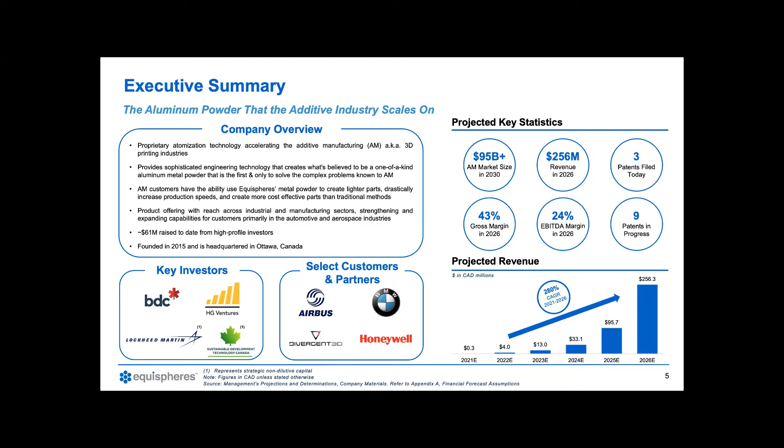The first 4 rounds were from Canadians across the country. We've had a really great track record of hitting our milestones, creating value, and steady improvement for shareholders along the way. We've been working with the world's leaders, literally in aerospace, automotive, and defense. Pretty much all the relationships you'll see today were all inbound demand.

Back in 2016, when we had first revealed our new technology and the material that's made from it, we had 20 calls from billion-dollar companies asking, how did we do it? And obviously we were very early and we couldn't ship a lot of it at that time. So we've been building up these relationships, the IP, the validation, until this year, where we're bringing online our commercial reactor products and starting to supply the market.

So you sort of see some of these highlights here, so I won't try to read them all out for you, but we're in a really neat spot. We're in a market that's just inflecting now, and we're at the right spot in the value chain, just at the right time, we feel.

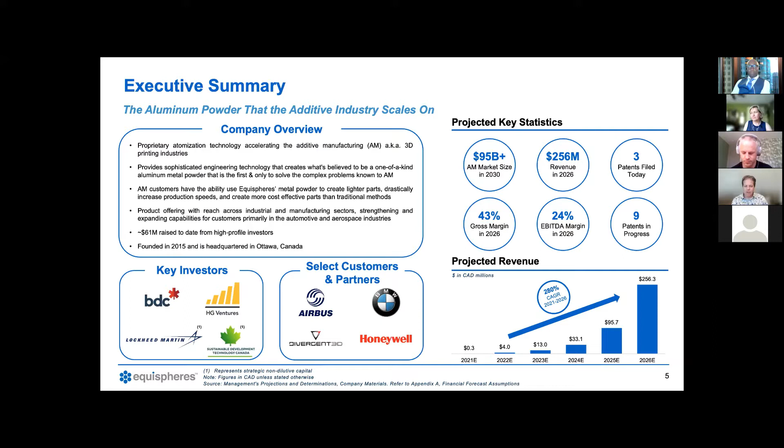I know a lot of people haven't seen 3D printing of metals before, so there's a good 70-second clip here from GE, which I think explains it really well. It shows you basically how companies are going to make parts from powder instead of your traditional sheet and different materials.

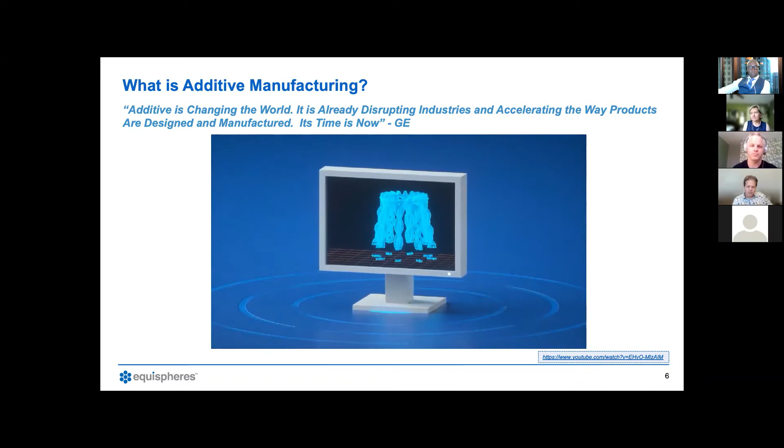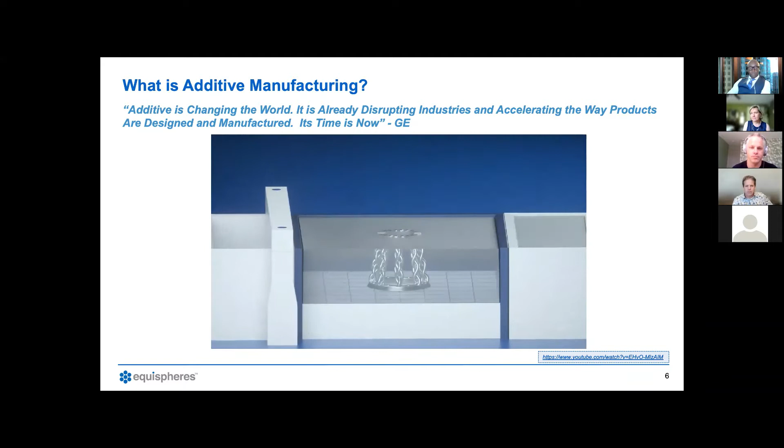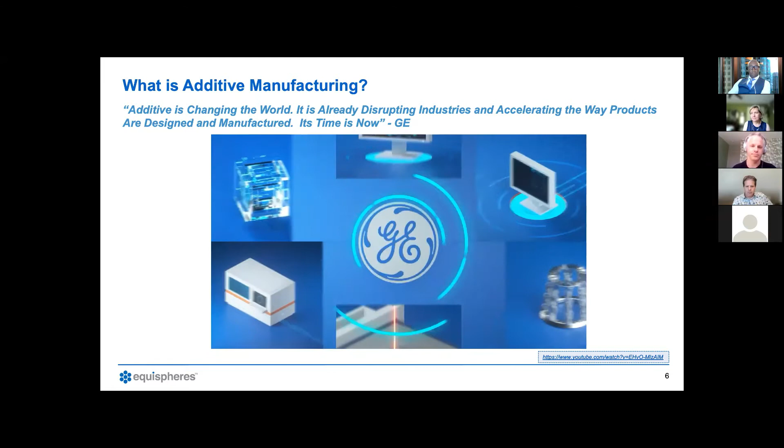What is additive manufacturing? Additive manufacturing, also known as 3D printing, is a process that creates a physical object from a digital design. An engineer designs the object using computer-aided design, or CAD software. The 3D design file is then sliced into thin layers and uploaded to an additive manufacturing machine. The manufacturing process begins once an extremely thin layer of metal powder is spread across the platform. A heat source, such as laser or electron beam, then melts the first layer of the 3D design. The platform is lowered, and another layer of metal powder is spread across the platform. The layering and melting process is then repeated until the part is complete. The metallic powder is removed, and a physical object is revealed. Additive manufacturing allows you to produce parts that are lighter, stronger, and more durable than traditionally made parts. Build times are faster. Engineers can add precise features and complex geometries without increasing cost. In fact, additive manufacturing is revolutionizing the way we work.

Hopefully that's helpful to explain how this process works. So what Equispheres does is we have a technology that's completely unique and solves the key problems faced by the industry in using metal powder.

The applications you see in front of you are the reasons that people would 3D print metals in the first place, and a lot of them revolve around lightweighting. You can make pretty much any part lighter by using 3D printing, because you can put material only where you need it. You can redesign your parts to be more cost effective, to use less material, to be lighter, and save fuel.

On the right side, you can see how traditional manufacturing, in the GE example, you've got 8 components there that are made separately, cast separately, and then assembled, where you can make a better component that does the same thing in one shot. There are all these great examples of consolidating parts and simplifying manufacturing, one great example being the GE catalyst jet engine, where they reduced 855 parts into 12.

One way to look at that in manufacturing is that you'd do everything this way if it was fast and inexpensive enough, so it's all around the speed. When they talk about replacing the multi-hundred billion dollar casting market with 3D printing of metals, nobody disagrees this is a better way to manufacture, to reduce inventory, supply chain, lightweight parts. It's really just an issue of how fast and when.

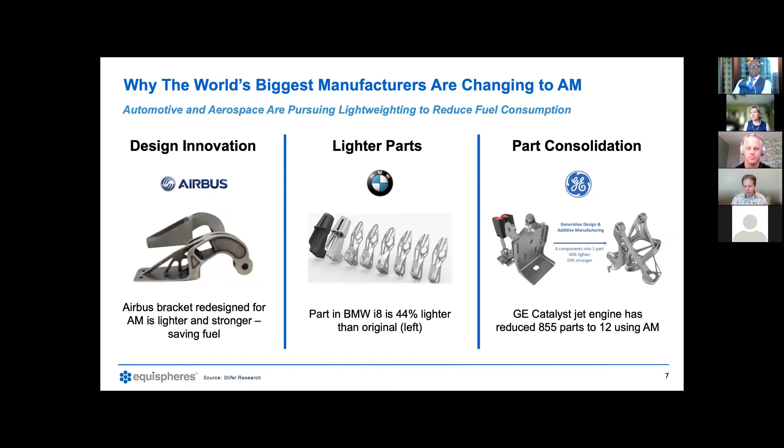The supply chain end of it has really been heightened the last year, so you hear a lot about onshoring, reshoring, and 3D printing of metals fits that to a T. A lot of you might be more familiar with 3D printing of plastics, which are typically used for prototyping, one-offs - they're everywhere, every school, every university, even companies use them to prototype consumer products. But 3D printing of metals is all about industrial, serial production of parts used in production. So the market's much larger, much more industrial based and more technical - there's more technology, lasers, high precision, everything.

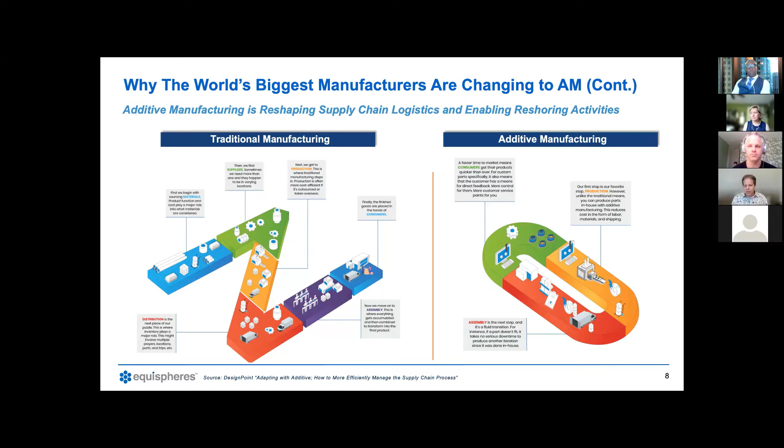And you think of the military applications, and that's why the US Army is working on this pretty heavily, where you just have 3D printers in containers with powder in the field, and you're getting rid of all these difficult logistical issues that go with moving people all over the world.

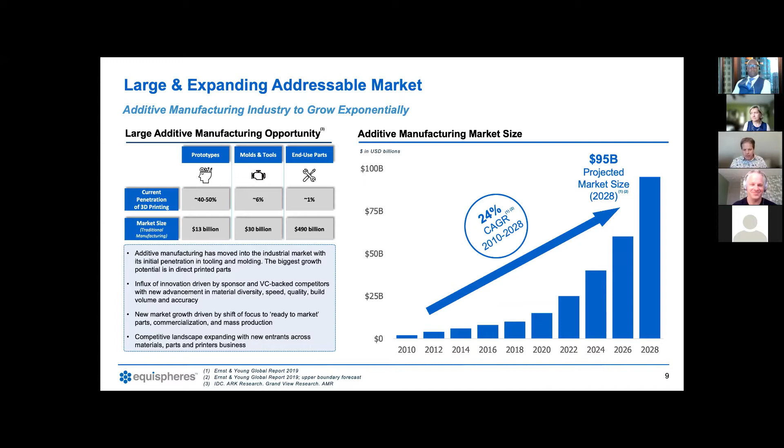So the market is just going to grow and grow and grow. The key inflection points are the speed and reliability of the process. You couldn't find any defense, aerospace, or major automotive company that wasn't actively or heavily involved in it. There's billions of dollars been invested to start to change over their manufacturing. I think what you're going to see next year is the real inflection point in this business - you can see it from the investment coming into the companies helping make metal 3D printing faster.

So these are some examples here. The market is valuing speed - whoever can help make metal 3D printing fast is attracting a lot of investment.

A couple of examples would be Arcam on the left there - that's a Swedish company. A bit of a Canadian story here too - they purchased, I guess it was the only other metal powder company in Canada at the time, called Advanced Powders and Coatings out of Montreal, for $35 million on about $5 million of revenue back in 2016, 2017. And then Arcam was bought by GE for about $1 billion in two tranches, with negative EBITDA at the time, I believe. And Desktop Metal is the fastest unicorn in US history.

They make high-speed metal 3D printing machines that print about 100 times faster than traditional metal 3D printing machines. They've got investors - all the big names, whether it's the Googles, the car companies, Koch Disruptive Technologies are all in there. And ExOne below that, similar high-speed metal 3D printing.

There's a lot of companies out there that are into plastic printing, and it's really important to think of those a bit differently - they're not really industrial companies, they're in a bit of a different market.

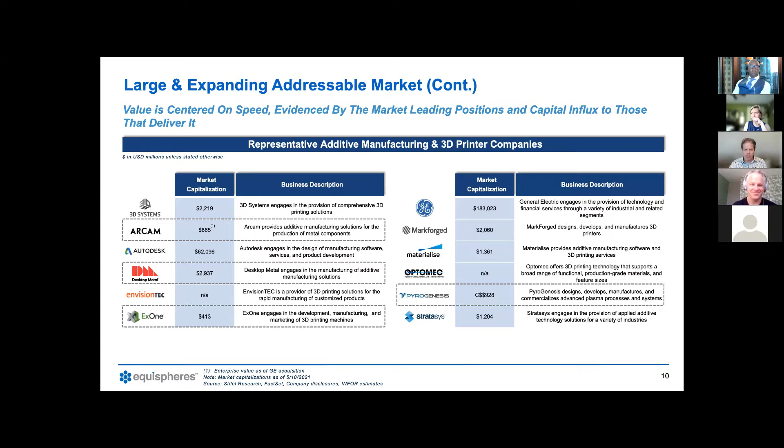Equispheres, we're really different. So when you think of the competitive landscape, if you're us, there's two technologies that make metal powder. Those are called atomization technologies.

There's billions of dollars of powder sales globally. So powder's not something new, but this technology was invented a long time ago, before laser 3D printing or any of these 3D printing measures were conceived.

Those technologies are poor at making powder that is necessary for metal additive manufacturing, 3D printing. So when we first published the images of our powder back in 2016, we had inbound interest, inbound calls from major aerospace, defense, NASA, Oak Ridge Labs, the big materials companies, all saying, how did you do that? Because they all had problems in what they were doing, that they had a pretty clear understanding of what would solve those problems, but nobody had ever seen powder like this before.

It doesn't take a ton of imagination to imagine that you don't have a lot of processes that are high precision, that rely on a material that's inconsistent.

On the left side, you'll see traditional powders. Those are powders made from other technologies. The powder is all sorts of different shapes and sizes. A lot of it gets stuck together. And you imagine putting a laser beam across that and trying to create a very consistent melt of material to make a part. It doesn't really work that well.

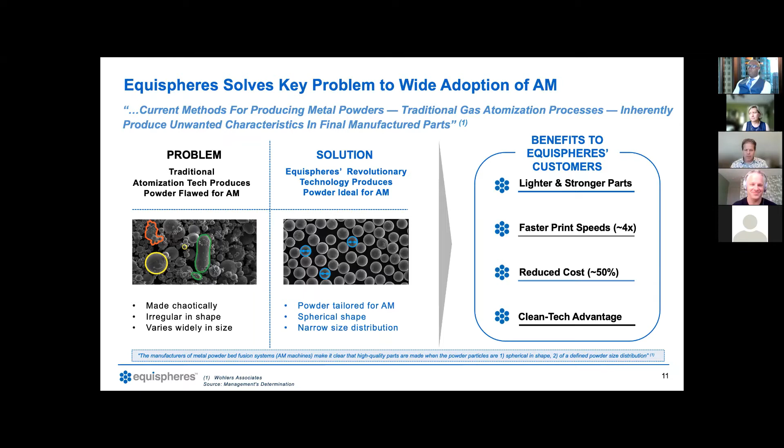On the left side, you'll see traditional manufacturing of how people make metal today. There's a whole bunch of different steps that go into assembling or making a metal product. The future is on the right, where you're basically atomizing powder, turning it into a powder from a raw feedstock, and then printing it. Much simpler steps.

In the printing end, there's been a ton of momentum on the investment side. But the atomization technology part is really what's missing from all of those processes. On the right side, that's a picture of our commercial atomizer that's coming in June, July this summer. That's a big step forward for the company.

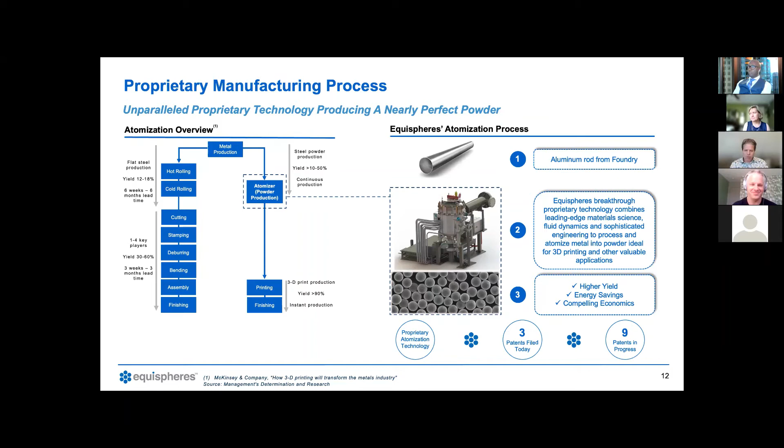We've currently been working with these atomization reactors that are 26 feet tall and humongous. This is a result of probably about $10 million of investment into miniaturizing and commercializing our technology. That's coming online this year. We're excited, and we've been working towards this point for several years.

This is another slide showing you the difference in the cost. 3D printing of metals today is slower and expensive. That whole light blue area underneath is the bulk of the cost, and it stands to reason if you print 4 times faster, that you're reducing the cost of the overall process.

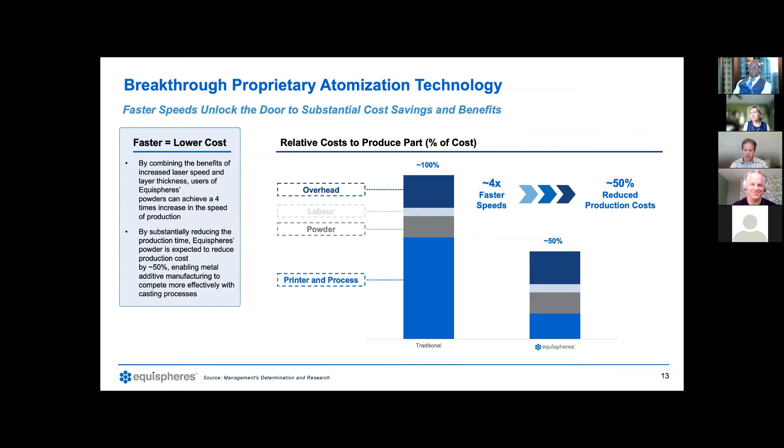There's all sorts of other benefits aside from that, like the safety aspect, the repeatability of the process, that you don't have to worry about having inconsistent mechanical properties in your parts. But we really focus these days on how important the speed is, because that's what's really going to kick off the mass adoption. We spoke a bit about the clean tech benefits already.

One of the challenges with traditional atomization technologies is that since the powder is made so chaotically, most of it goes to waste. So when you looked at the competitive powder that we showed you, that was sort of the best 30% of it. The other 70% is not applicable for additive manufacturing because the powder's just too variable.

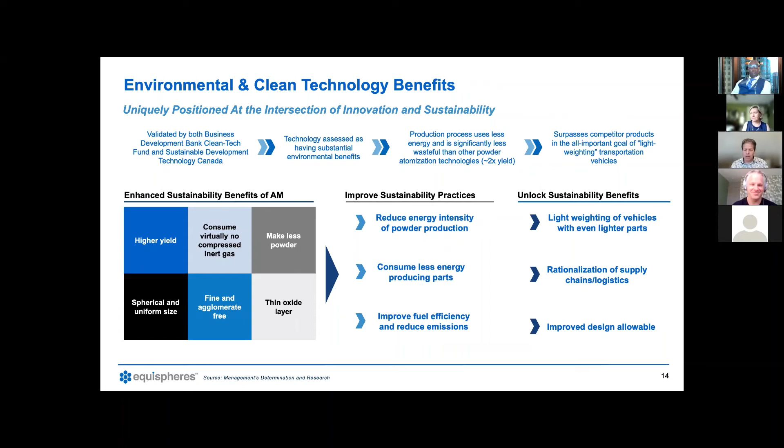Our process produces a much higher yield of saleable powder. So you have less energy input, makes parts that are 30% lighter. And it actually spurs on the whole adoption of metal additive manufacturing to higher levels, which has tremendous weight savings in automotive and aerospace.

Important to note that this whole business plan you're seeing is all just aluminum powder for additive manufacturing. Aluminum isn't even one of the largest materials at the moment - it's things like steel and titanium. One of the reasons is that aluminum has been so hard to get in a good powder.

So there's going to be tons of substitution into aluminum. And even without the substitution, it's clearly the one everybody wants, because everybody wants to use aluminum in cars and planes since it's the lightweight material. So we're really unlocking a lot of pent-up demand.

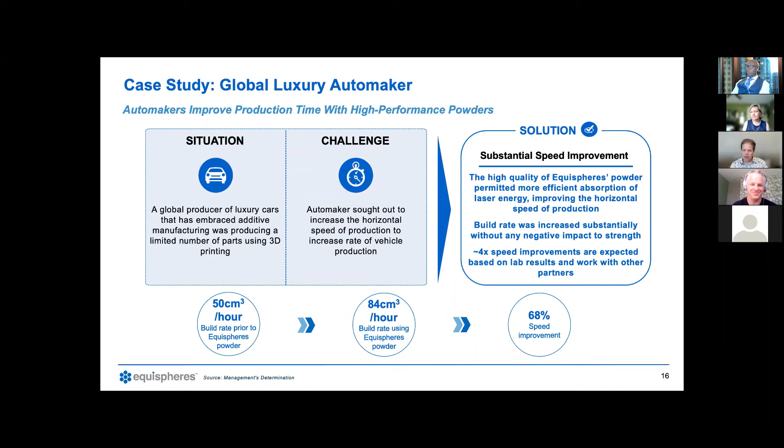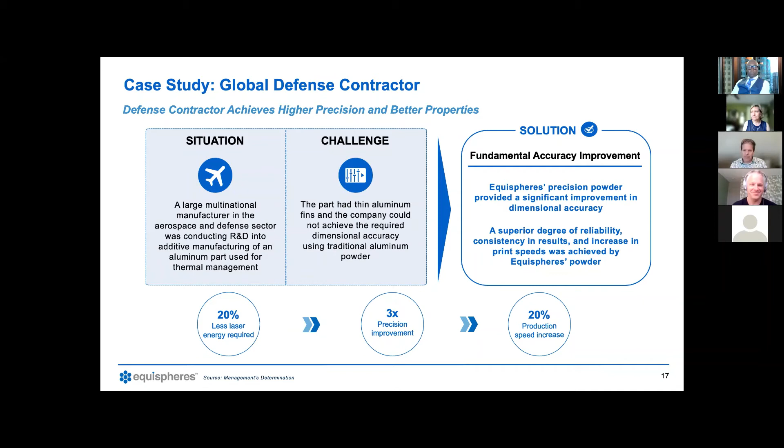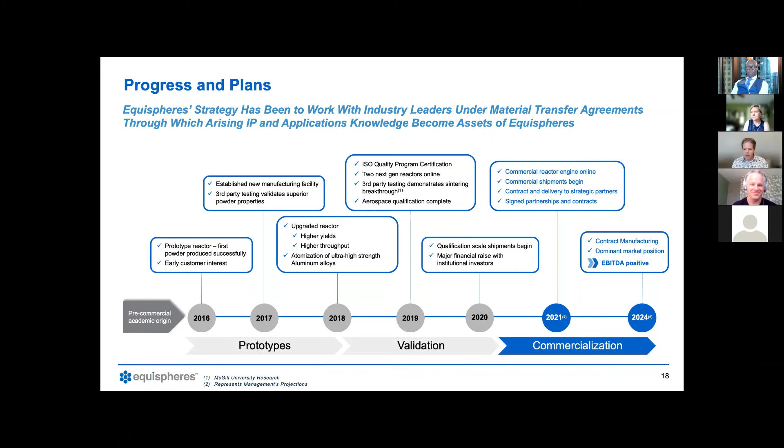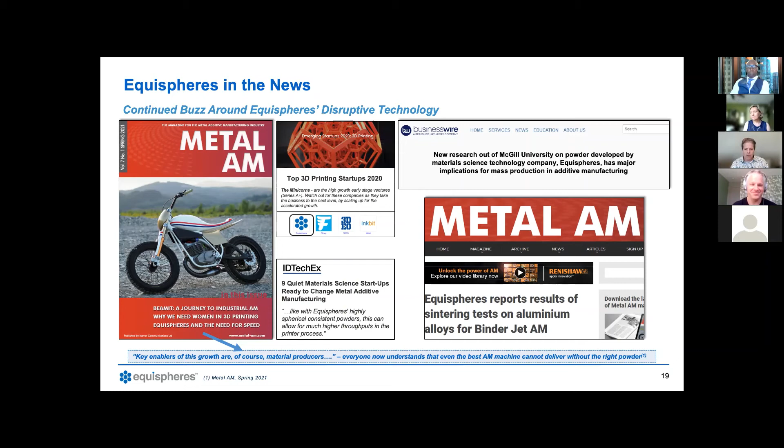Beyond that I'd just be reading, but we're getting a good ramp up now in terms of public validation about what we're doing. We have big barriers to entry. We've invested a lot to date to get to where we are with some of the world's leaders in fluid dynamics and material science. It's not easy to get to where we are, and if you did, I'd say, well, if it looks like our powder, it's our powder.

It's a long lead time - we started back in 2016, and we don't know of anybody who's any closer to doing what we're doing. For a small company like us up in Canada to have that kind of traction with these world-leading companies - if you were getting into the market today as a second or third follower, it's pretty hard to break into companies like that to become a viable supplier. So we feel pretty good about the relationships we've developed and the reputation.

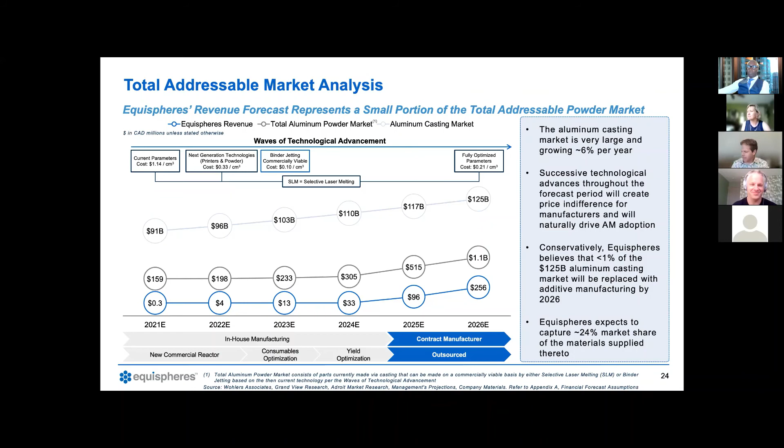Can I have the next slide? With this next slide, what I want to be able to emphasize for you is what our vision is for how you capture that market. What's our business model in order to do that? So there's a couple of messages here.

First of all, the growth from a very small amount of commercial powder to $256 million in this time period is going to be addressed in a couple of ways. First of all, internally, we intend to build a small fleet of atomizers and reactors that are going to be able to address new alloys that we need to develop, as well as to address small niche players.

But we intend to partner with contract manufacturers, foundries that already sell the aluminum, the most expensive component of the powder we produce. By partnering with contract manufacturers beginning about 2024, we can really de-risk the supply, both by 2026, but certainly beyond, because they have the experience in supply chain management and the ability, low cost of debt, and the ability to manage the logistics that this implies.

The second thing that I wanted to emphasize in terms of our vision is the fact that the concept would be that we would own the end customer relationship, and we would do that with our own team, but also we would be partnering with value-added resellers and channel partners over this time period so that we can begin to capture the portion of the market that's addressable.